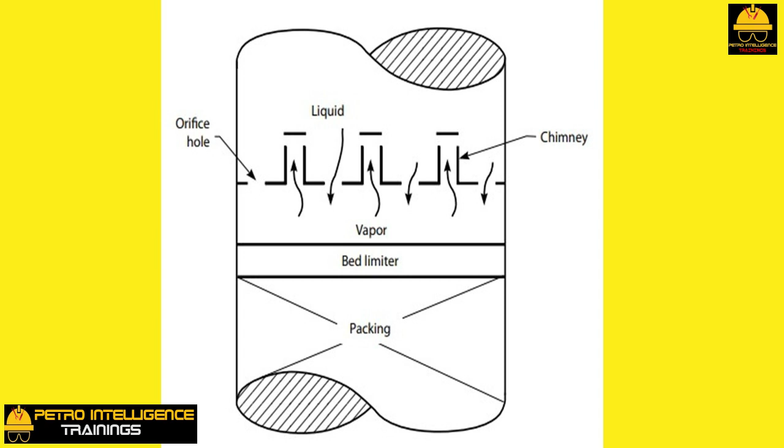The pressure drop of the vapor flowing through the chimneys is delta PV equals Kc dV divided by dL times Vg squared, where delta PV equals pressure drop of the vapor flowing through the chimneys, in inches of clear liquid.

Kc equals an orifice coefficient for a chimney plus a chimney hat, typically 0.6 to 0.9. dV equals density of vapor, dL equals density of liquid, Vg equals velocity of vapor passing up through the chimneys in feet per second. The orifice hole pressure drop is delta PL equals K0 VL squared.

Where delta PL equals pressure drop of the liquid flowing through the orifice holes, in inches of clear liquid. K0 equals an orifice coefficient for a hole in metal plate, typically 0.4 to 0.6. VL equals velocity of liquid draining through the orifice holes, in feet per second.

The sum of delta PV plus delta PL is the total height of liquid on the chimney tray. Let us assume that this total height is 6 inches of liquid: delta PV equals 5.1 inch, and delta PL equals 0.9 inch.

The flow of internal reflux, or liquid through the higher portion of the tray deck, falls to zero. Worse yet, vapor starts to bubble up through any orifice hole that is not submerged by at least 5.1 inches of clear liquid. But of course, once vapor bubbling begins, we do not have clear liquid in this region of the tray deck.

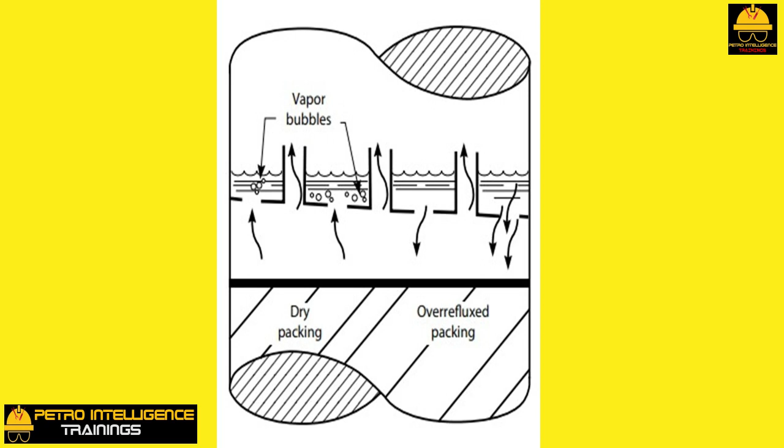But I will say that such liquid distributors are expensive to build, tricky to design, especially for small liquid flows, difficult to install correctly, and occupy quite a few feet of tower vertical height.

There's a trade-off between efficiency and capacity. In a tray tower, we can increase tower capacity by reducing the number of trays and increasing the tray spacing, but reducing the number of trays in turn reduces separation efficiency.

In a packed tower, we can increase tower capacity by using larger packing and increasing the open area, or a bigger crimp size for structured packing. But the reduction in the wetted area of the packing will reduce separation efficiency.

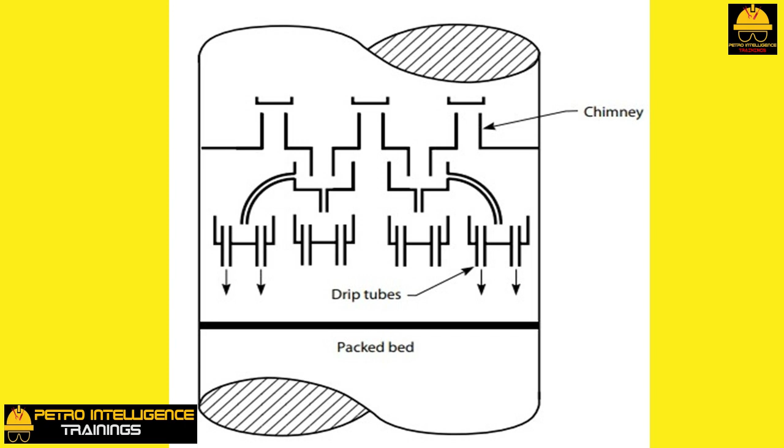The older style chimney trays, which may have had a few large round or square chimneys, reduced the separation efficiency of the packing. To work properly, the vapor distributor has to have a reasonable pressure drop in comparison to the pressure drop of the packed bed.

For example, if the expected pressure drop of a 12-feet packed bed is 10 inches of liquid, the pressure drop of the vapor distributor ought to be about 3 to 4 inches of liquid.

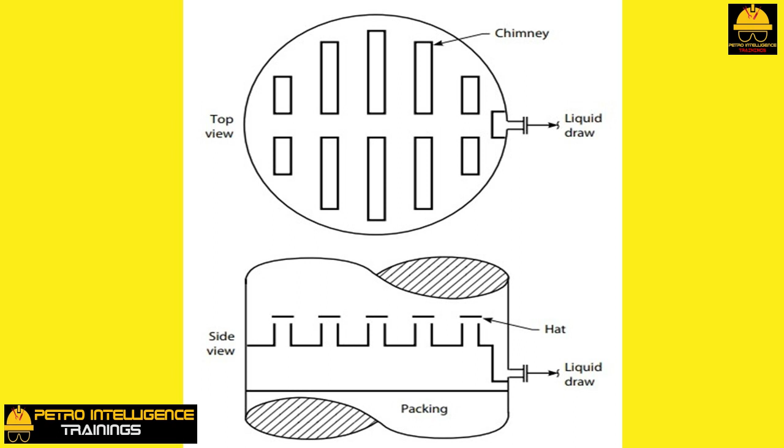In practice, the most common reason why vapor flow is mal-distributed as it escapes from a well-designed chimney tray is distortion of the hats. I believe this is due mostly to workers stepping on the hats during unit turnarounds. The hat support brackets are designed to support a 20-pound hat, not a 200-pound welder.

Maintaining functional and structural efficiency in packed towers.

Pressure drop. A packed tower can successfully fractionate with a much smaller pressure drop compared to a tray. For a modern tray tower, to produce one theoretical tray's worth of separation, a pressure drop of about 6 inches of liquid is needed.

A bed of structured packing can do the same job with just 1 inch of liquid pressure drop, even allowing for the vapor distributor. In low-pressure fractionators, especially vacuum towers used to make lubricating oils and waxes, this can be of critical importance. Packed beds also seem to have better turn-down capability than valve or sieve trays at low vapor flows.

On the other hand, many packed fractionators seem quite intolerant of reduced liquid or reflux flow rates. This is typically a sign of an improperly designed distributor in the packed fractionator. The problem of poor fractionation efficiency due to inadequate vapor and liquid initial distribution is similar to tray deck dumping in tray fractionators. And just like trays, packed towers are also subject to flooding.

Flooding in packed towers. To understand what is meant by flooding in a bed of packing, one ought to first understand what is meant by the idea of holdup.

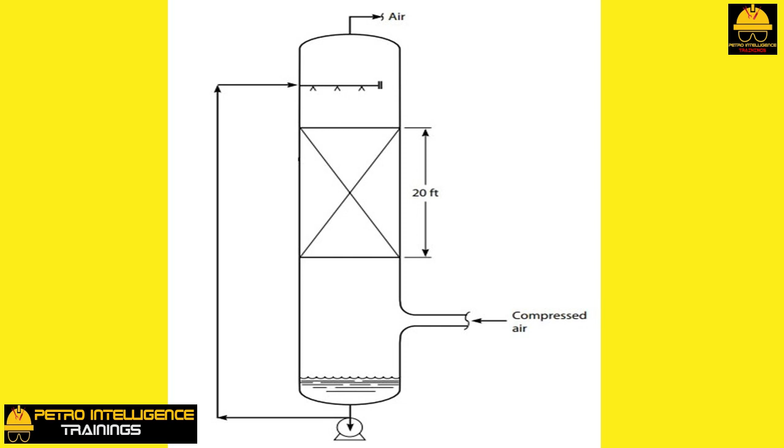As the water, which had been held up on the packing by the flowing air, drains down, the water level in the bottom of the tower rises from 2 to 5 feet. We say, then, that the holdup of the packing was 15%: 5 feet minus 2 feet, divided by 20 feet, equals 15%. If the liquid holdup is too low, fractionation efficiency will be bad.

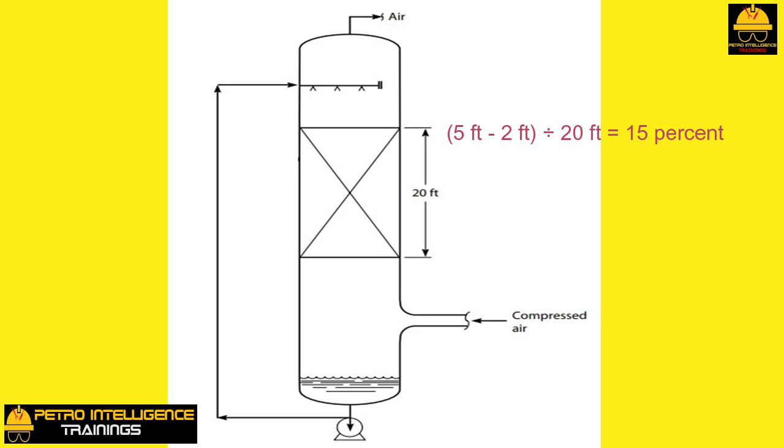We say that the height equivalent to a theoretical plate, HETP, will be high. If the liquid holdup is too high, fractionation efficiency will also be poor. We again say that the HETP will be high. This idea is expressed in this picture.

When the holdup rises above the point that corresponds to the minimum HETP, we can say that the packing is beginning to flood. The minimum HETP point in this picture corresponds to the point of an incipient flood, discussed in previous videos, for tray towers.

For structured type packing, a liquid holdup of 4 to 5% corresponds to this optimum packing fractionation efficiency. For 1-inch Raschig rings, this optimum holdup would be roughly 10 to 12%.

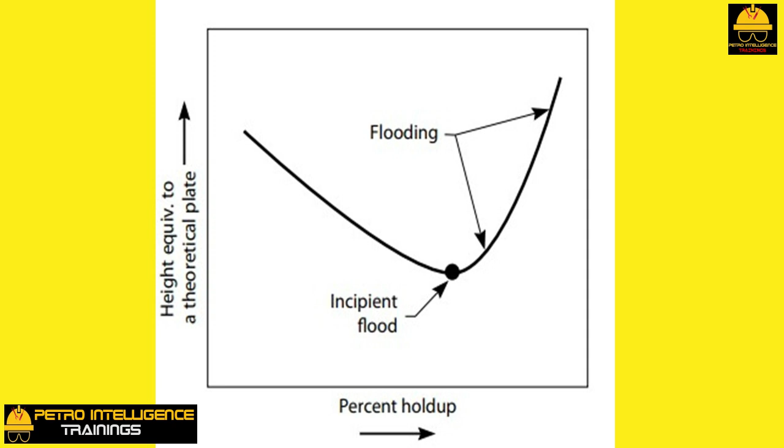There is a close relationship between percent liquid holdup and pressure drop, expressed in inches of liquid per foot of packing. If the pressure drop per foot of packing is 1.2 inch, then the liquid holdup is roughly 10%: 1.2 inch divided by 12 inch equals 10%.

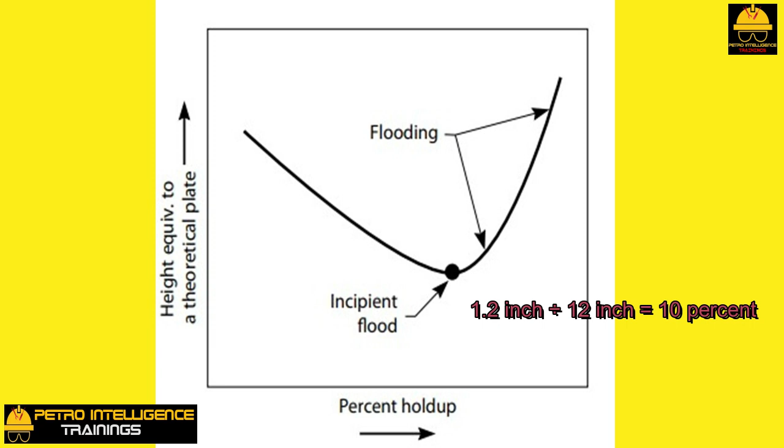Unlike the perforated tray decks discussed in previous videos, there is no simple equation to predict the optimum pressure drop that would correspond to the minimum HETP for different types of packing. There is just too much diversity in both size and shape to generalize.

Packed bed supports. A simple support for a bed of 1.5-inch Pall rings might consist of a bar grid with 0.25-inch thick bars set on 1-inch centers. The grid itself in this picture would be supported by two 6-inch wide I-beams.

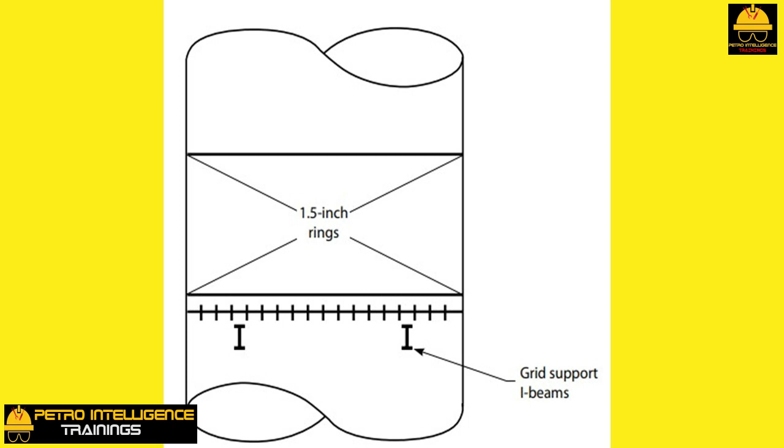The open area of each component: 1.5-inch Pall rings, 80%; grid support, 75%; I-beam support, 90%. Considering that the rings, the grid support, and the I-beam are all in close physical contact, what is the open area at their mutual interface? The answer is 80% times 75% times 90%, equals 54%.

This means there will be a restriction to vapor and liquid flow at the grid support, which will promote flooding at the bottom of the bed. Naturally, this would cause the entire packed bed to flood.

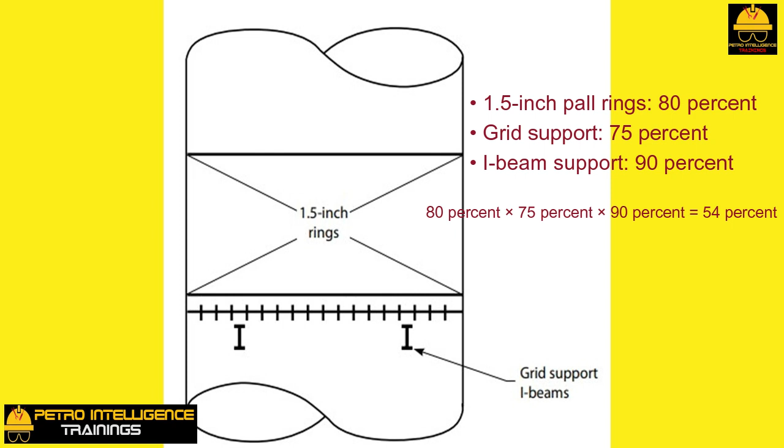To avoid such flooding, the designer uses the corrugated bed support shown in this picture. This grid will have over 100% open area based on the tower cross-sectional area. Crushed packing lying on even this excellent type of bed support can, however, cause flooding if the crushed packing has lost most of its open area.

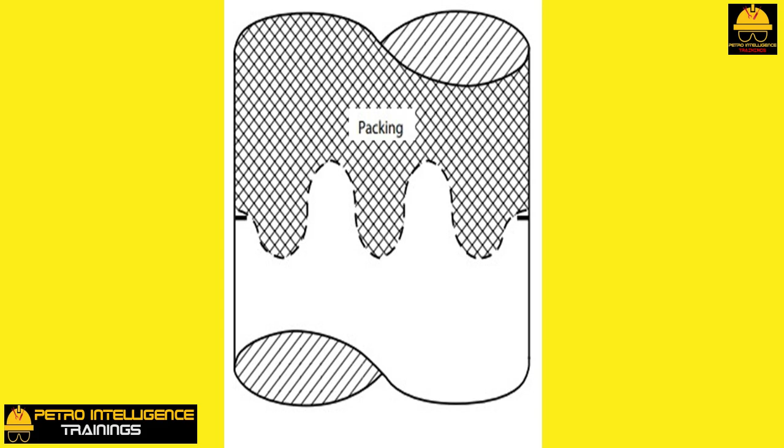Packing hold downs. During routine operations, the weight of a bed of packing is sufficient to keep it in place. But if there is a pressure surge during startup, the packed bed can be forcefully pushed against the underside of the liquid distributor. If this liquid distributor is a spray header, as illustrated in this picture, the spray bar arms can be bent.

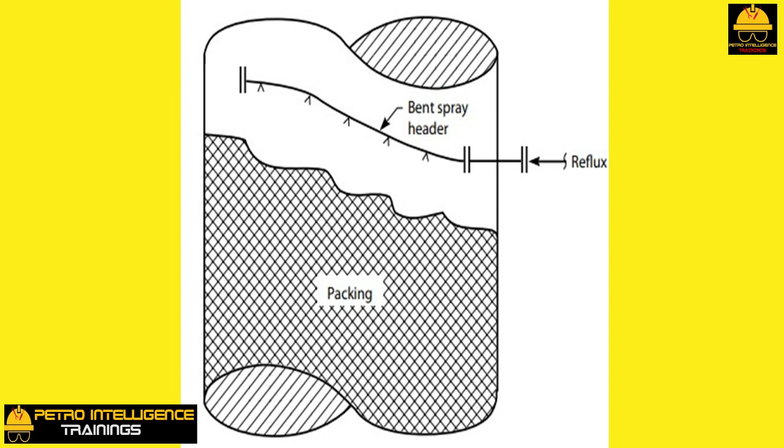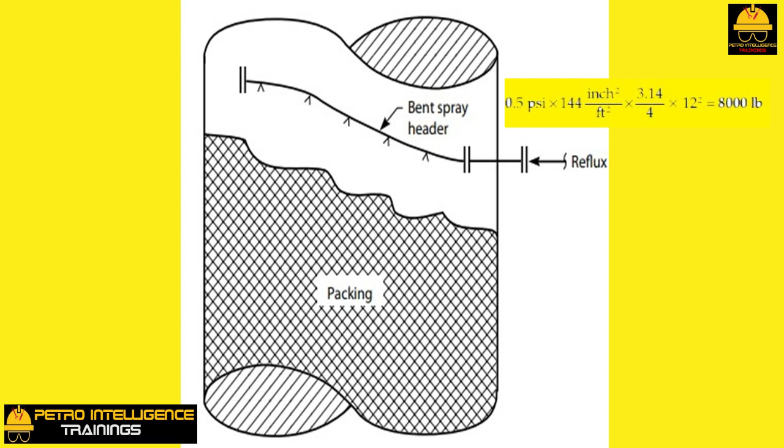To prevent this, a packing top hold-down grid is required. This hold-down grid must be firmly attached to the vessel wall. For example, in a 12-feet ID tower, the hold-down grid is designed to resist an uplift force due to a pressure surge of 0.5 psi. What is the total uplift force? Answer is 0.5 psi times 144 square inches per square foot times 3.14 divided by 4 times 12 squared equals 8,000 pounds.

This picture illustrates a problem introduced when a packing hold-down was installed at the wrong elevation. This tower was designed to purify acetic acid by distilling overhead the lighter formic acid. But at even 50% of the design reboiler duty, the tower flooded, and acetic acid was carried over into the formic acid. The problem was that the perforated plate hold-down used to keep the 1.5-inch Teflon rings from floating up through the feed chimney tray distributor was located immediately below these chimneys.

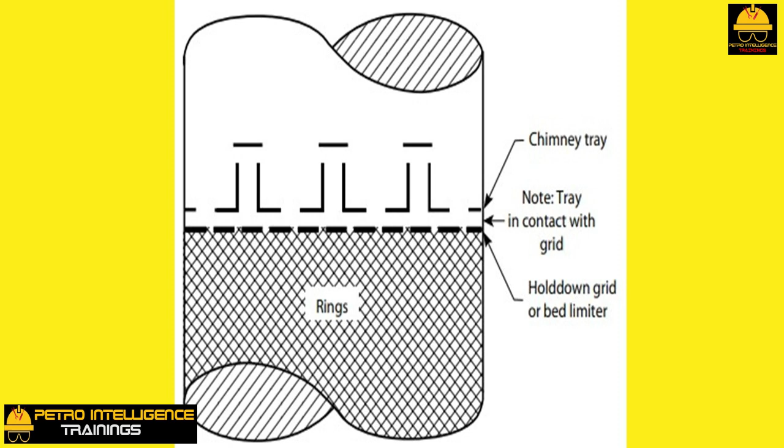What, then, was the open area at the interface of the chimney feed distributor, the 1.5-inch rings, and the hold-down plate? Open area of chimney feed distributor equals 40%. Open area of rings equals 70%. Open area of hold-down plate equals 30%. Answer is 40% times 70% times 30% equals 8.4%. As a result, the tower flooded above the hold-down plate.

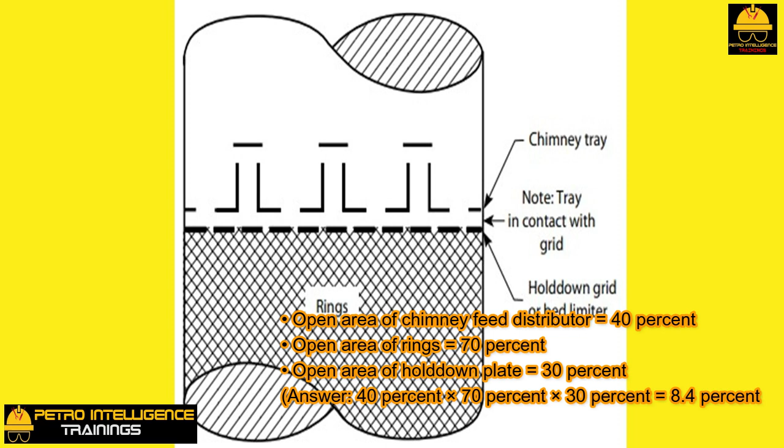To fix this problem, the packing hold-down was dropped 15 inches below the chimney tray. As a result, the tower fractionated properly. Incidentally, this incident was a multi-million-dollar mistake. It was not, however, a design error. The installation crew had simply found a cheaper location to install the hold-down grid by using the same support as the chimney feed distributor.

Crushed packing. One of the great disadvantages of packing is the inability to properly inspect the installation. In one gasification plant, the off-gas scrubber flooded because of a plastic bag left inside a packed bed of Pall rings. On another tower, flooding of a bed of structured packing occurred at 50% of design.

Only when the packing was removed for inspection was the problem revealed. Workers had previously stepped on and crushed intermediate layers of packing. Then, probably without realizing that they had reduced the open area of the structured packing by 50%, they set additional layers of structured packing on top of the damaged layers.

The situation on a tray tower is far more controllable. Even after the tray assembly is complete, the process engineer, using only a crescent wrench, can open a few tray deck manways and double-check the tower internals. But to pull 6 feet of packing out of a tower is a major undertaking. Also, trays can be stepped on without damage.

Beam supports and 40-pound air guns can be dragged across a sieve tray with impunity. Packings, rings or structured, require special handling during installation or turnarounds. To be frank, all packing installations that I have seen have been damaged to some extent.